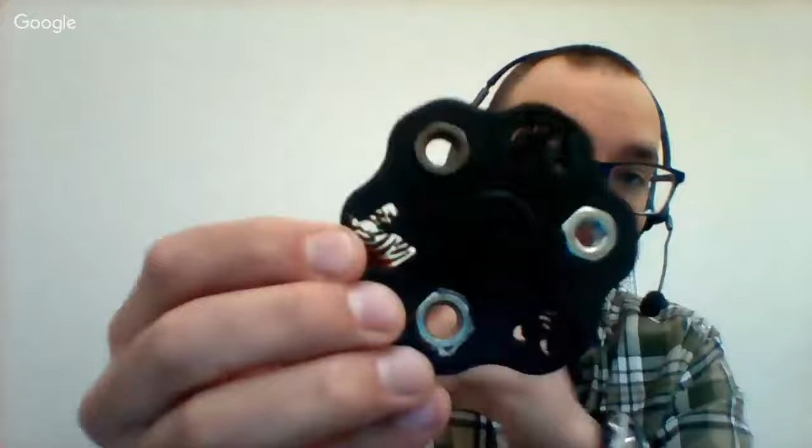Let's see if you can get a good look at this. And this one, our logo is a zebra. You can kind of see our MBHS on there, and there is our zebra cutout as well.

We're not going to get too advanced in how to do this, but you can kind of see this shape here on this one is a little more circular, so it's easier to see. A lot of times we have a hard time visualizing that this is actually built off of a circle until you start spinning it, and then you can notice that they're just circles.

So we're building this off of circles, all right? What else do you need to know? Well, we need to know the sizes of everything. I have a decent set of dial calipers. This will work. You could also use, to a lesser extent, a standard ruler.

Anytime we build anything practical in the world, we're most likely going to have to go through the metric system, the decimal inch, and fractional inches. We're going to be using, say, a standard skateboard bearing, which has standard sizes that you get when you buy them. They tell you we have a 22 millimeter diameter on the outside, an 8 millimeter hole, and it's 7 millimeters thick. So you've got 7 millimeters thick, an 8 millimeter hole, and a 22 millimeter outside diameter. So 8 on the inside, 22 on the outside, and 7 millimeters thick.

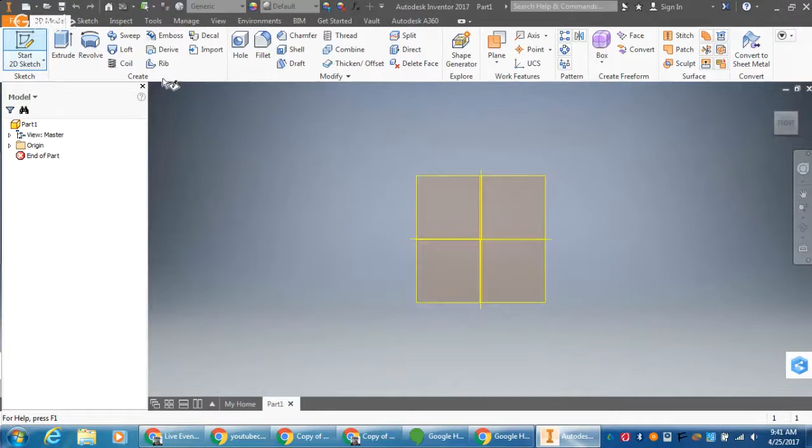So we're just going to go off the exact sizes. I'm going to start off with a new 2D sketch. If you've been following my videos before, we always start on the XY plane, and I always start at the origin or the central axis here.

And I'm going to again start with just circles. So I'm going to click the center, and I have a 22 millimeter outside diameter, and there's 22 millimeters. That works out to 0.866, or 866 thousandths of an inch, is what it rounds to. But I make sure I put in 22 millimeters, and it'll automatically convert for me.

The next thing I want to do is get the diameter of the overall size, so I know my scope, the parameters I need to work within, and that's going to be just another circle. Again, make sure it's concentric - if you start on the center point, it will be. I wanted 2 inches in terms of a radius, therefore 4. Enter - 4 inches is going to be my diameter, and now I can hit the home key.

When you hit the home key, it's going to zoom all the way out so you can see everything. I'm tripping over my own words here - I was trying to find the home key on my laptop. It's not the same spot as my desktop, so that's what that was.

Anyway, so all of this here, this central hole is just going to be a hole. That's where we're going to slide that bearing in.

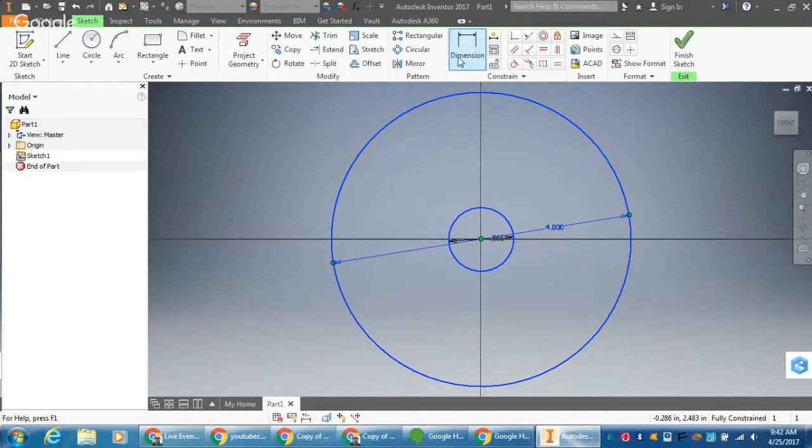I'm going to hit escape, and I want to highlight all of this stuff here, and I'm going to make these construction lines. So up here, construction - I can also right-click construction line. Why am I making these a construction line? Because this is just what I'm going to be using as a basis, my guideline. I'm going to use these in constructing my part here.

The next thing we need is figuring out the size of our counterweight. Now, I would measure this, or if you're going to order them online, you already know the distance. If you're using a hex nut, hex nuts have 6 sides, and these 6 sides are all flat and parallel to each other. The only thing you really have to know is the parallel distance. Since I have a pair of dial calipers, I can get a more accurate measurement, and the tighter these measurements are, the better. I'm getting about 745 thousandths on my hex nut - this must be a 3/4 hex nut here.

So how do we do this? There's something else I'm going to want. I don't want my hex nut touching the edge, the outside edge of my spinner, because then there will be no material to hold that in. The general basis for a decent thickness that I've found really works is a minimum of 100 thousandths, just so we can worry about wear resistance, that sort of thing. But we can kind of slide this up to the outside, just do it by eye, and let's make sure we have something like 200 thousandths away, just to be extra safe, because I'm going to put a little fillet on the outside of this.

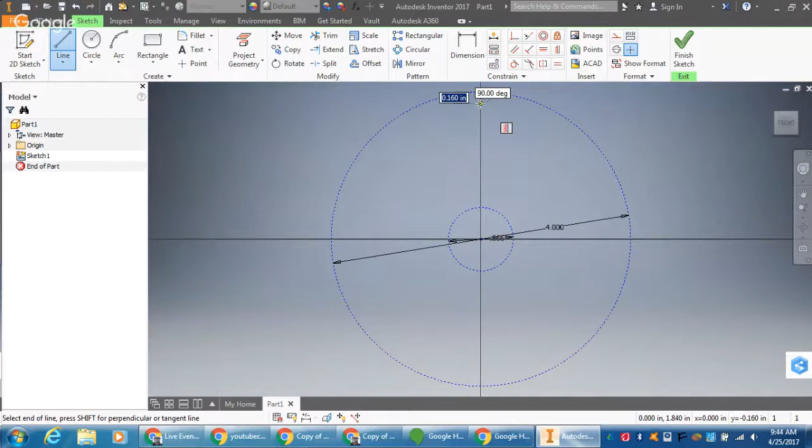And what does that mean? Well, if I take another line and go from here and start dragging down, this is going to be the distance that I'm going to be using, and I want this to be 0.2. So now I'm going to hit escape, and now I have a distance of 0.2 away.

And again, I'm going to right click on this, and I'm going to make that construction. Construction. So now I have a construction line, or a starting point. So I know that my hex nut, I want it to be 200 thousandths away to make sure I have enough wiggle room, so if I drop this on the table, it's not going to split.

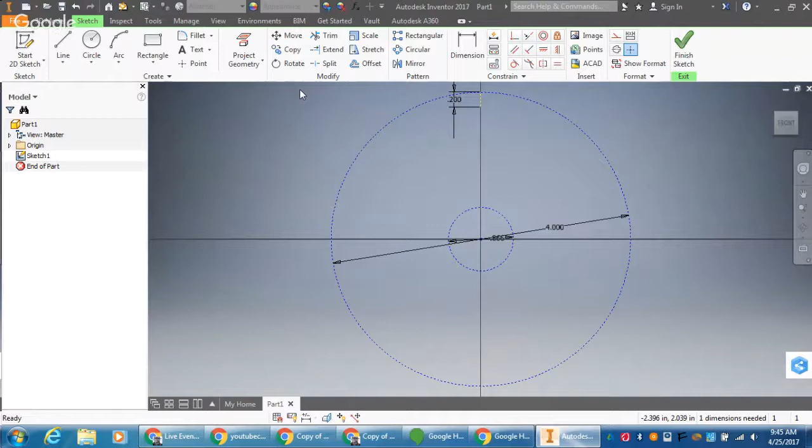So now let's make our little hex. So how do we make a hex? Well, a hex is a polygon, a multi-sided polygon, so we need to find a polygon tool. And here's a polygon tool - it's underneath, if you have the rectangle up, it's right here. The default is 6, and yes, I do want a 6-sided polygon. I'm just going to click at the end of that little line I made.

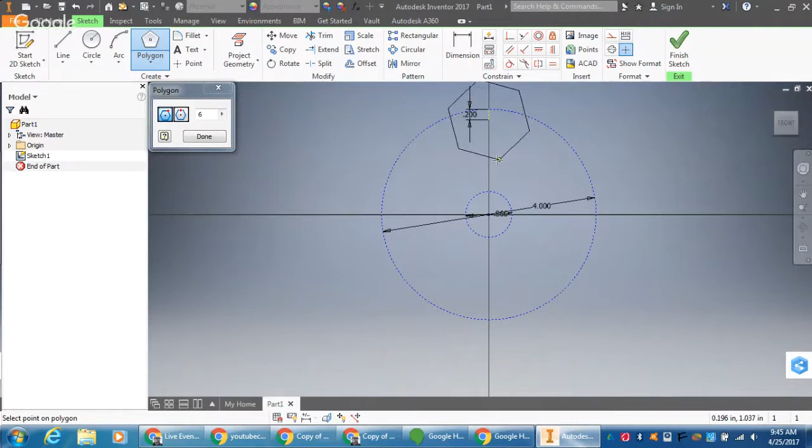But that's going to give me the center actually on this one. Trying to zoom in and zoom out here with my pad. So if we know that we want this to be 200 away, and if I just click my polygon now, that's going to give me a size, and that's going to be the center point of the polygon itself. So I don't want that. So if I go over my polygon and go, let's see here, circumscribed. So let's make this - sorry about that. So if we start using our polygon tool, we have to decide which way we want to orient this. I'm just going to do it so the point of this edge is straight up, and I'm going to take this and drop it down anywhere, and you see all the constraints pop up. I'm going to hit escape.

I said I have 745 thousandths from here to here.

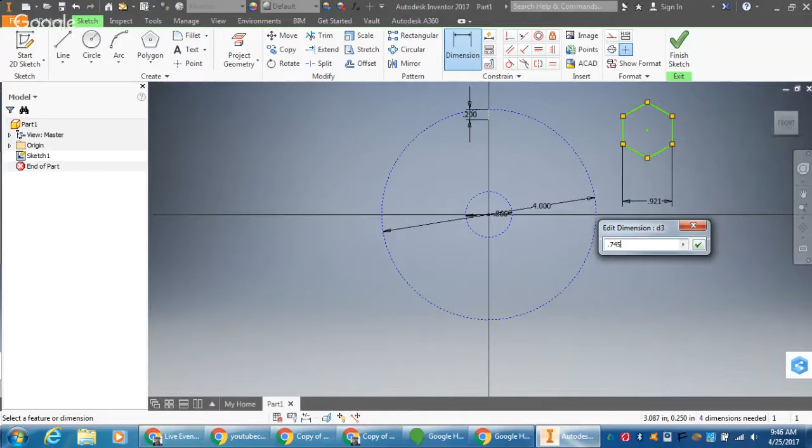So 0.745. There, okay. Now I can hit escape again, and I can just drag this over until I get it close to where I want it. And now if you zoom in, I can make a coincident constraint here to there.

And there we go, now I have the base of my spinner. And I know I have a 200 thousandths gap. Let me zoom back out here. Good to go. So now I know my nut is going to fit. And since it's a 6-sided polygon, all of the sides are going to be equal, so I know my nut's going to fit perfectly in there.

Now here's going to come the hard part. I know that I want to have something here that is 200 thousandths away from all sides. So I'm going to take... how do I want to do this? Well, there's multiple ways to do this, actually.

You can start off by taking this line and making it, say, straight up and down, and making this just 200 thousandths away, from right here if I want. So it doesn't really matter the length right now, I'm going to show you why in a second.

So let's just make ourselves a real rough rectangle. Make sure that this attaches to here. And the way to do that, I'm going to hit escape, and make a coincident constraint there. Coincident just means that they are touching.

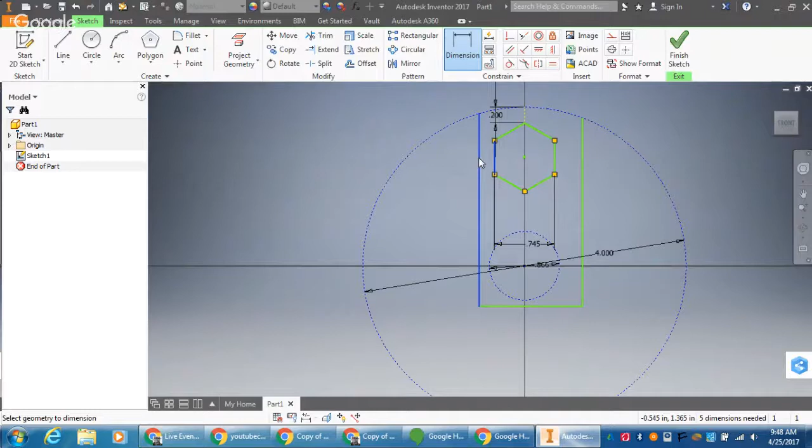I'm going to set this distance to 0.2, set this distance from these two things to 0.2. Okay, and now since I kind of have the overall shape that I want here, which is pretty good, I'm going to go right-click on... let me hit escape. Oops, hit escape before you do this.

Select my circle. I'm going to undo the construction line part now. And now that I have points that intersect, I can actually trim the remainder of this. Okay, so that's one way to do it if you want to keep that arc. But I actually don't want to keep that arc.

So what I want to do is take this and actually finish it off. I'm going to show you why in a minute. I want my outside edges to be completely round, and I don't want to deal with this uneven shape. But again, the shape is really up to you.

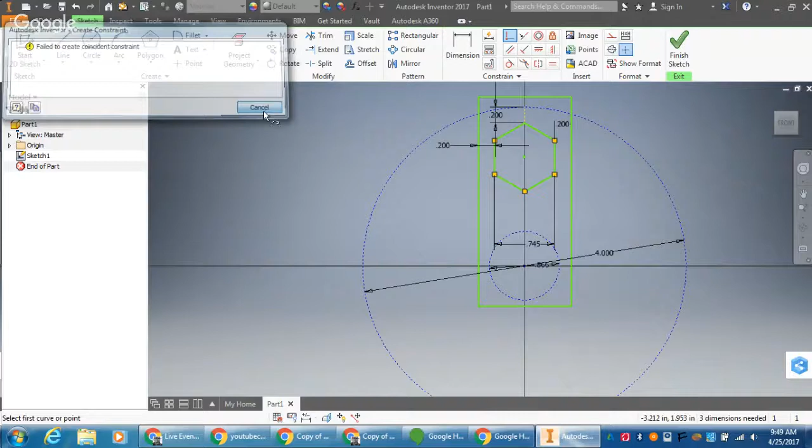All right, and that's really what we want to do. So I'm going to hit escape here. Okay, and there we go. So here we have just a rectangle. And actually this one, let's see, if we do it this way, I can actually undo

this circle here. Sometimes when we do these, I will cut the circle out last. But since I'm going to show you a little easier way first, and then I'll show you the more advanced way later, actually. Just made up my mind just now.

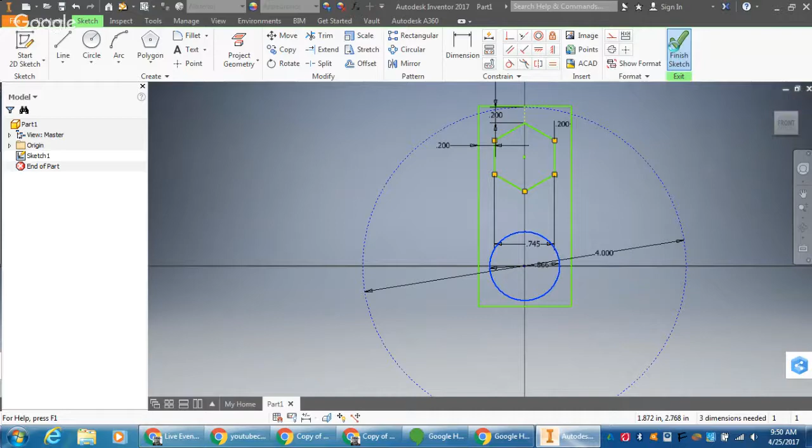Hit the home key, finish that sketch, make a home key. And then I'm going to extrude just that geometry, okay? I'm just going to extrude that geometry right there. When I extrude that geometry, I'm going to make that a distance of the thickness of the bearing itself, which is 7 millimeters.

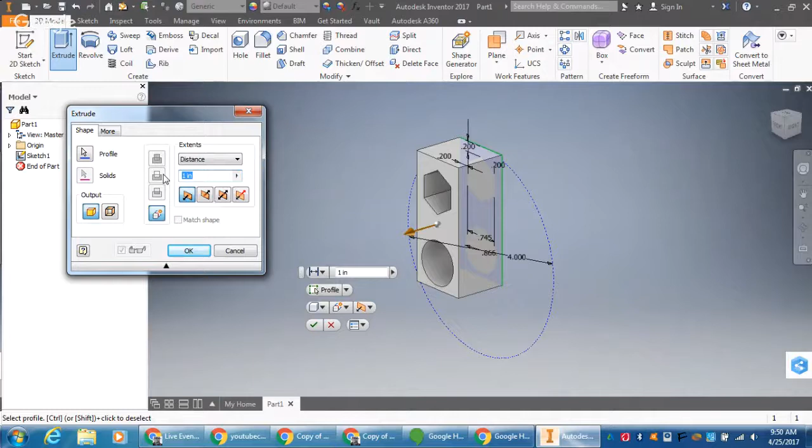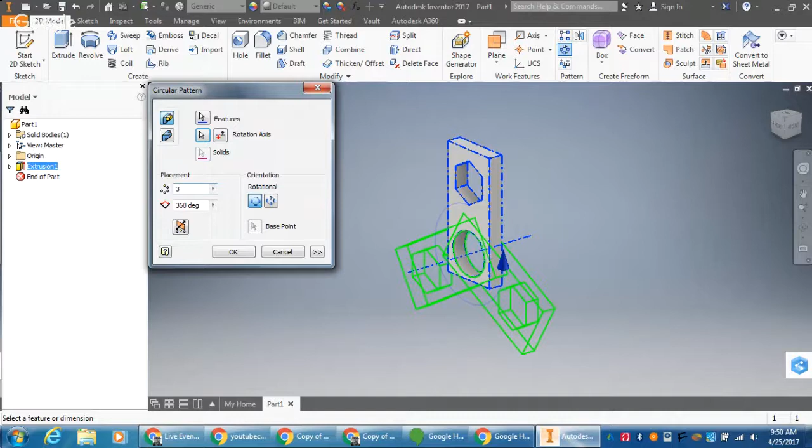And then all I have to do is go ahead and do my circular pattern. I want to circular pattern all of this. All right, and the rotational axis I want is that circle there. And I only want 3. All right, and that means it's going to be offset 120 degrees.

And there's home. And now all I have to do to really finish this up, since I'm really close to this, is fillet all of these. And since these are all the same distance away, I have...

745 thousandths, right? And then I also have another 200 and then another 200 here. All right, so I'm looking for the overall distance. So 200 plus 200 equals 400. 400 thousandths plus 745 is 1145 thousandths. So that's 1145 thousandths, right, and that's going to be the entire distance.

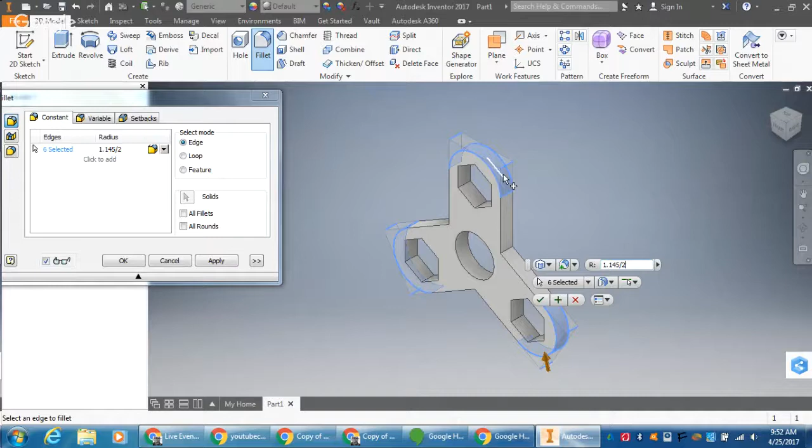But I want that divided by 2. Okay, and how I got that was I added up all these distances together. So you have 200 plus 745 plus 200, and you got 1.145, and then divided by 2 because I'm putting a radius on these. And now these radii on this corner and this corner will match up exactly.

And now I have a smooth curve. If you didn't want to do the math, you could have just left that curve from the original circle, but then you would have had an awkward transition from the straight to the edge. So this is just a cleaner way of doing it.

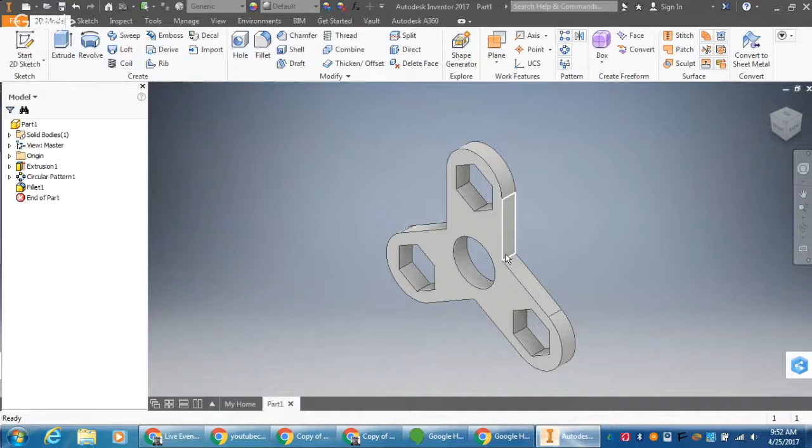Remember, anytime you have any of these things here, you're going to want to go ahead and fillet the inside too, because you see how that looks? So if we grab this again and repeat these fillets here, okay, let me grab the inside of that. Now all of those fillets will match. And you can see right now just by looking at the size of this, it's bigger than my example.

As it was, because I used 2 inches for my radius. And on my example, I only used 40 millimeters for my radius, which would have been 80 millimeters total, which is less than 2 inches.

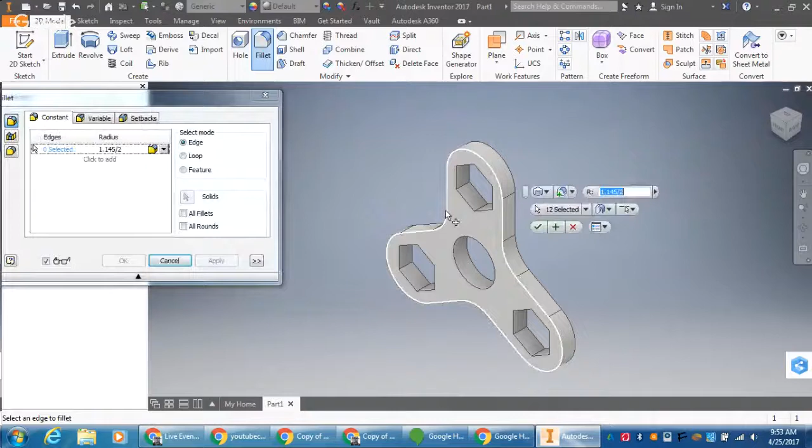And we always have to finish this off. Make sure we fillet all of our surfaces. So I'm going to fillet the front and the back surface. And let's look at 50 thousandths, see what that looks like. 75 thousandths, too much? Now let's go with 75 thousandths there.

All right, so that way we get a nice rounded edge. If you want a perfectly smooth round over, all right, you can see how I have a flat here.

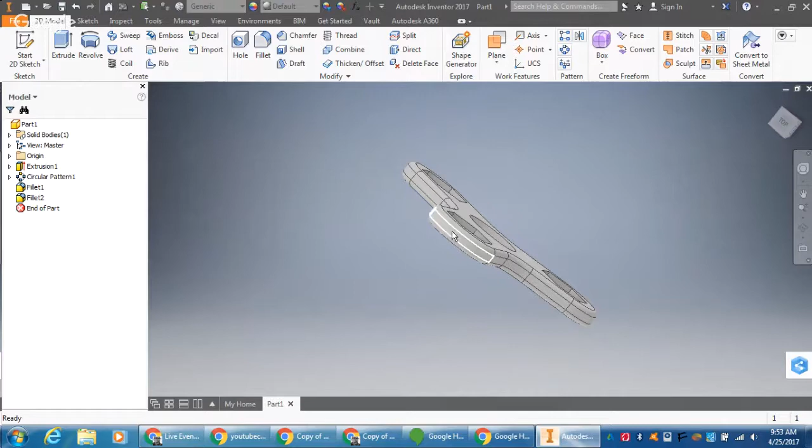Also, because we have to slide in the nuts and the bearing as well, it also makes sense to put a very small fillet over here as well. And the small fillet, I would say, is like 10 thousandths, yeah, about 10 thousandths, so 0.01. You can see it's just the tiniest fillet, and that's going to allow us to slide in

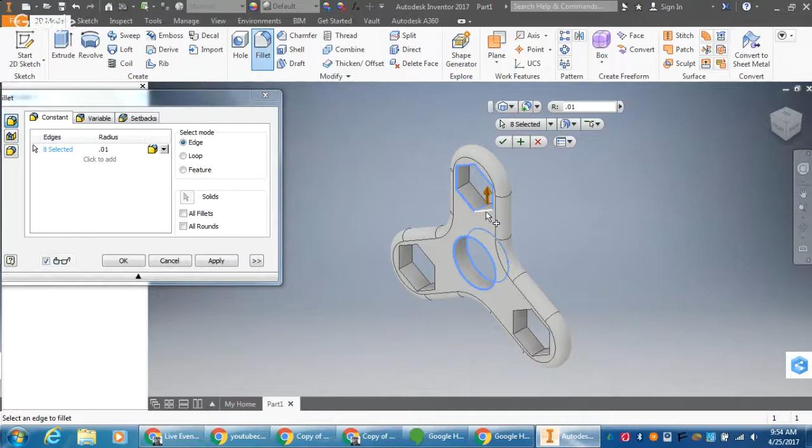All of these surfaces here, okay? And I actually canceled that one. But let me go back and do that again. Fillet, because I clicked on something else that I didn't want to click on.

Click OK. And then you can go ahead and do this for all of the surfaces too. You can do it for these surfaces here as well. But the nuts that I have are rounded over at the corner, so they will already slide in. So I don't have to fillet that, they're already sort of filleted on the nut itself.

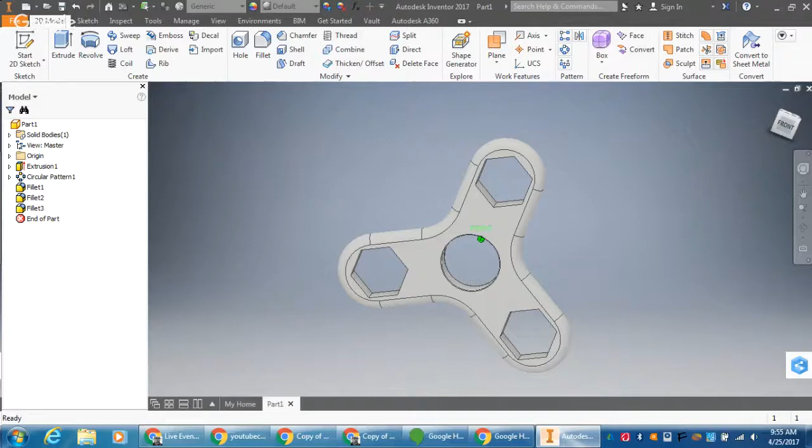But if yours have crisp corners or crisp edges like the bearing does, you might want to fillet that as well. And like I said, just 0.01, 10 thousandths, is going to be enough to let you slide that in there without giving you any sort of trouble. And so there you have it. Here is a large fidget spinner done.

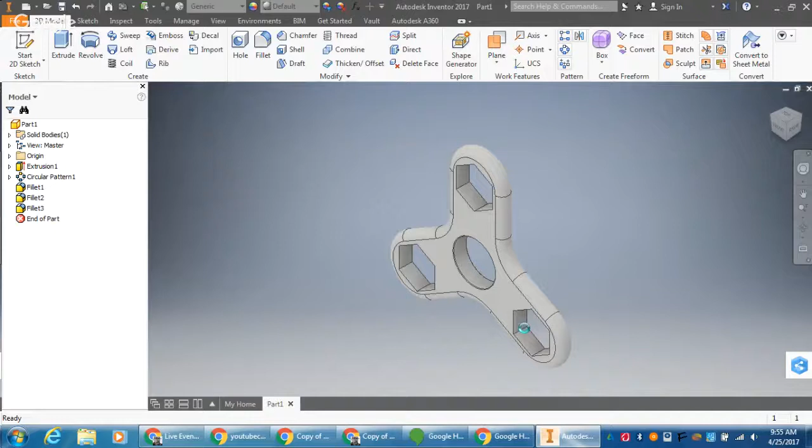All right, and all we have to do to finish this up, besides saving it, we have to save it somewhere and call it my test spinner. And I don't want to put that in my main drive. I'll stick it on my desktop, which is a very poor idea, but you want to make sure it's in your proper folder.

And the last thing that you need to remember to do is to export the CAD format, and you want to export an STL, or a stereolithograph file. So export a stereolithograph, which is going to allow us to open this up in the MakerBot software itself, so we can go ahead and 3D print. So again, same name, testspinner.stl, save that, and then you are good to go to the 3D printer.

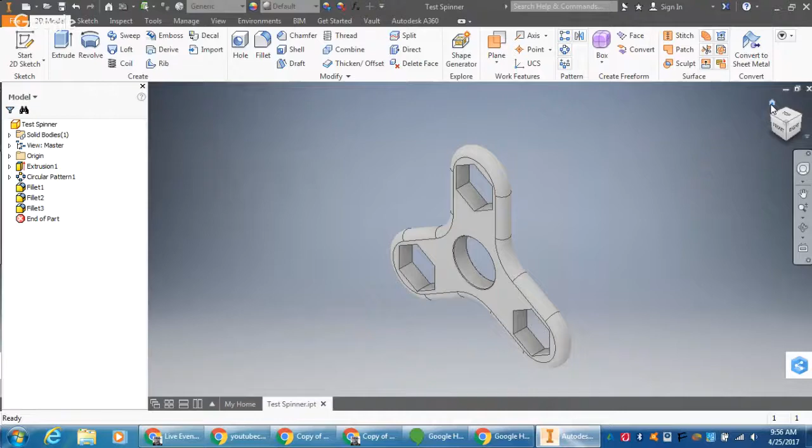All right, so this was just our overview of our basic spinner. We'll still have to come back and make the spinner caps, and I could talk about some more advanced designs later as well. So hopefully this was helpful for all of you, and I will see you next time.